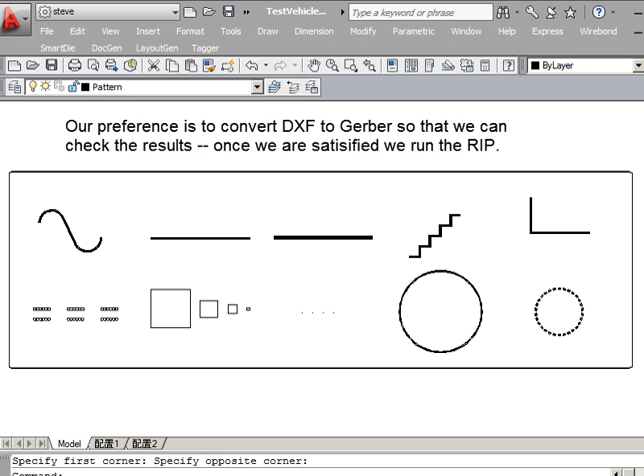So I'm going to show you what we have here. It's basically some test patterns. We have some nicely curved lines here, about 100 microns in width. We have some straight lines, some straight lines with bends, and more straight lines with bends.

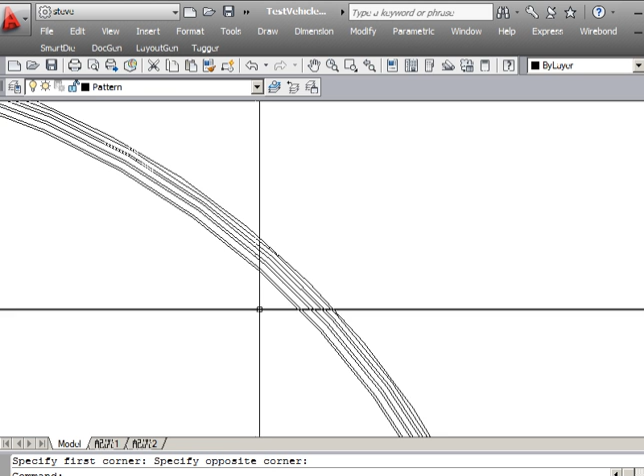Here we have some concentric circles which form rings, and that's going to require us to use the de-embedding feature in the conversion, because otherwise the outer ring would cover everything. And here we have some little rectangles. Now these are drawn with lines, as you can see, and they form some kind of a rotary encoder or something similar to that.

On the outside we have a polyline of 0.1 millimeter that acts as our boundary. And then there are various squares here drawn with closed polylines, some little tiny what appear to be circles, and some other squares and circles here.

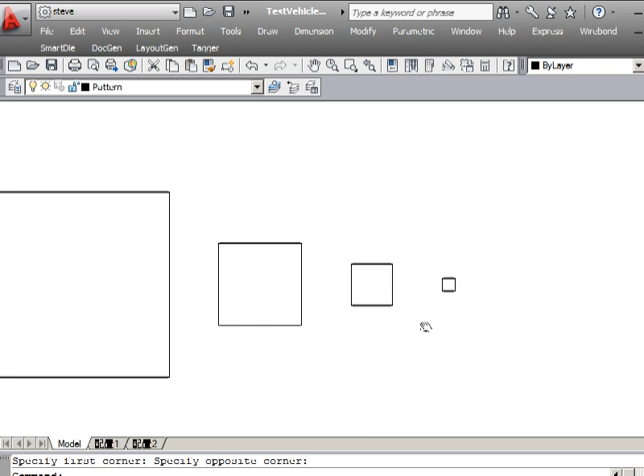Okay, so that's our test vehicle, and this is all drawn in millimeters. The overall distance is about 200 millimeters here, and as I said, our feature sizes are in the order of about 100 microns, 75 microns.

All right, so now we're going to run the conversion. To convert from AutoCAD to Gerber, or from DXF to Gerber I should say, we're using the ASM 500 program, and it takes you step by step through the process.

So we'll start by selecting the DXF file, and I want to use the one called Test Vehicle Cleaned, because that's the one I edited. I need to make sure I enter the units of millimeters. So I click OK, and it scans the file.

Now I'm going to configure the translator. I have several things to configure. First, I can set my Gerber settings. I'll have my Gerber in millimeters, format 4:4.

In my translator settings, I'm going to make sure that I have link lines and arcs on, so that those little lines get linked to closed boundary. I'm also going to turn on my de-embedding without cut lines, and I'm going to make sure I have 274x output. So those are the things I need to set.

The other thing I've done is I've set my arc resolution on my arcs down to 2 degrees so that I get some nice smooth arcs, so that I don't see any jaggies later on in my output.

Now I'm going to define an aperture table. And here's the apertures I'm using in Gerber. These are essentially little drawing tools. I have a basic round one of 0.01 millimeter, 10 microns.

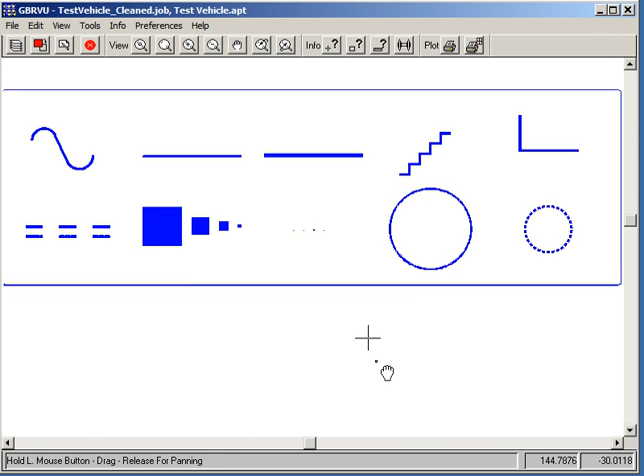And now we'll view our Gerber data. So there's our Gerber data. Let's center it, and let's zoom in and see what we have. Let's zoom in this area, and you can see that we have our same curves, and you can see that they're filled. So that'll be our arc test.

Over here are our parallel lines. Over here are our bent lines.

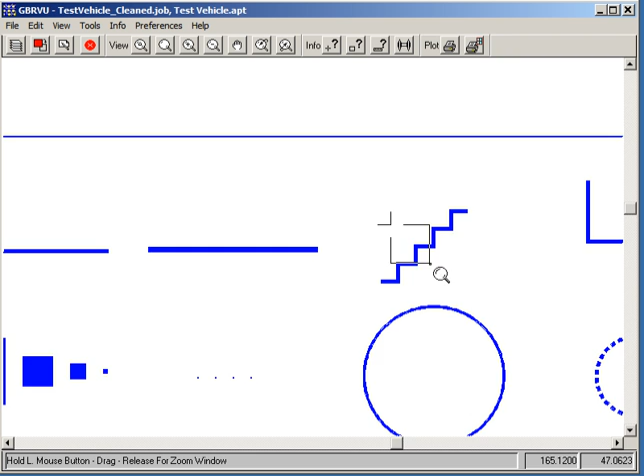Now here's our concentric circles, and because I used the de-embedding option, you see that instead of this outer circle covering everything, each time it hit a new boundary edge, it changed polarity. So we ended up with the same image that we thought we were going to have by using concentric circles.

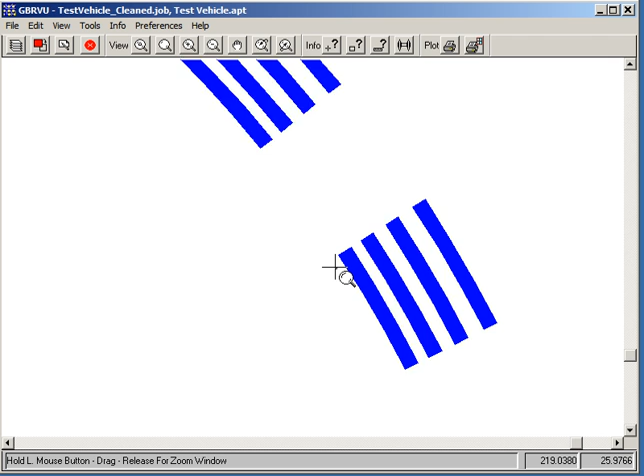And then here I have my little encoder, and you can see that we have the areas we want filled in. Everything is pretty much as it should be. Here's that outline that I created, the 0.1 millimeter outline. So now we have a Gerber file.

We should be able to run our rasterizer and produce a bitmap. We've created our Gerber file, and now we want to rasterize it. So we use the program called Gerber Rip, and this is actually an engine-based program, which is normally used by other types of programs. That is, it's usually wrapped around some kind of application. So I'm going to use it in command line mode just to show you what's done.

The first argument is the actual executable called Gerber to TIFF, because this includes the TIFF formatter. And then this is our input file, pattern to Gerber. This says automatically compute the window extents. This tells us it's in millimeters. This tells us it's 274x. This says we want to produce TIFF, and we want the file name to be

pattern2540.tiff. This says use 128 megabytes of RAM for your raster buffer. Probably don't need that much. This sets the DPI at 2540. So those are essentially the minimum requirements for the command line.

What I'm going to do here is just type pattern.bat, and you can see it returned in less than a half a second, maybe a quarter second. And if we do a dir, we'll see there's now a pattern2540.tiff. So let's have a look at that.

To look at the data, I'm using Artwork's very large bitmap viewer. This is a viewer that handles TIFF and BMP files that are very, very large. That's implied in the name. It lets you pan and zoom and measure things. So I'm going to zoom into some of these critical areas here.

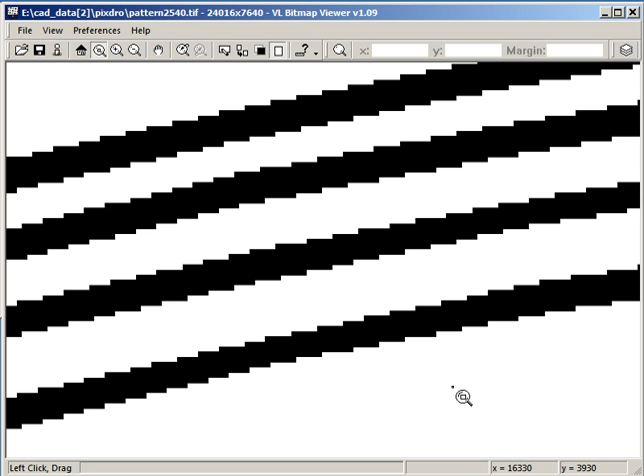And you can see how this is smooth across the entire arc. Okay, let's go back home again. Let's look at this guy here. These were our concentric circles. You can see what they look like at 2540 DPI.

Let's go back home again and let's look at our friends here. These were these little parts of the encoder, and again at 2540. The results you're going to get, of course, are going to depend on your DPI. You can't expect excellent results if you only have a few pixels to image the line.

So I thought what we might do is run this same job at a higher DPI and see what things look like. To do that, all I have to do is create another command line, and this time I just changed the DPI to 5080 and the output file name to 5080. Just run it here.

And it takes a little longer. It's generating 4 times as much pixels. You can see that the 5080 TIFF file is about 91 megabytes. And this is uncompressed, by the way. I didn't ask it to compress it. So let's see what that looks like.

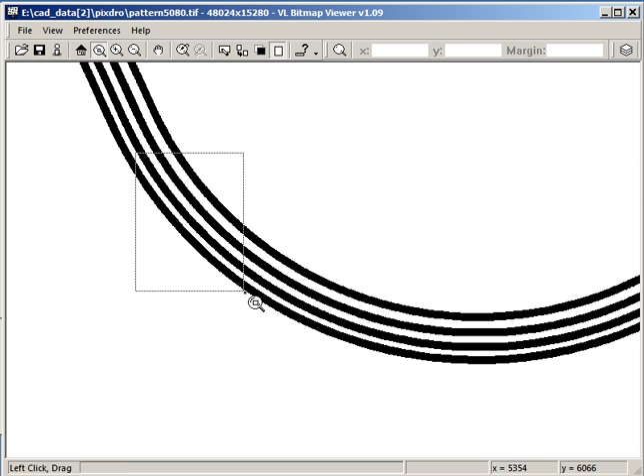And there's our 5080. You see it still opens very, very quickly. And let's have a look now in this range area here. Things are looking a lot smoother because we have, you know, twice as many pixels to image the line with. So looking a lot nicer. And if we look in here, you see that these look a lot nicer also.

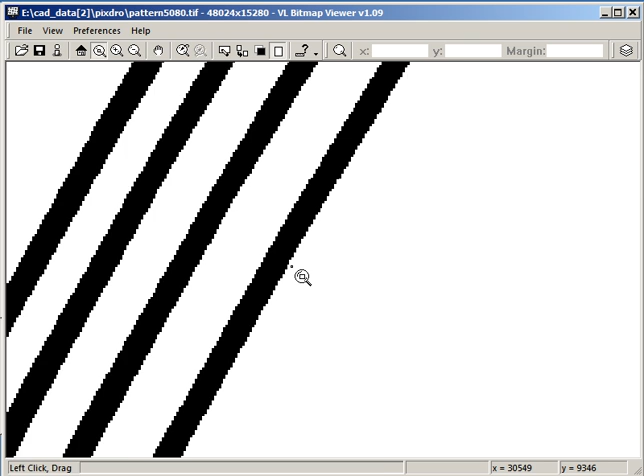And one more, let's look at our concentric circles. You can see these also look much smoother. So as far as a test vehicle, rasterizing this is not a big deal. We rasterize much bigger files at much higher DPIs with the same software. But what's important, of course, is the integrity of the data, how accurately it comes to matching the input data. And you can see it's quite good. Thank you.